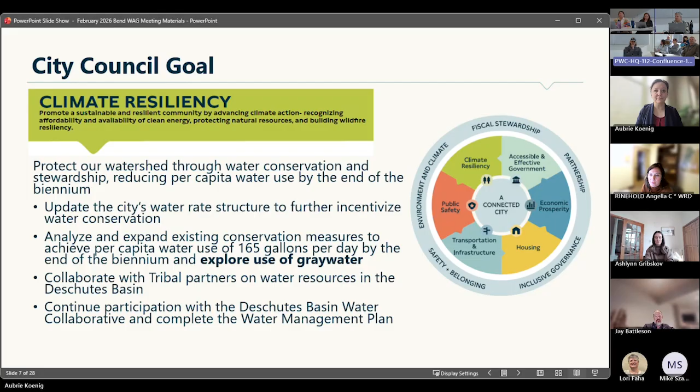So that's kind of just a little bit of background, and then I'll hand it over to our friends in buildings to talk about this with everybody.

I'll just do a quick intro and then hand it over to Jerry. Again, my name's Joe, Building Safety Division Manager. We've got about 41 employees. If you haven't noticed, Bend is growing fast. We've got a lot of challenges. Our division looks at energy, accessibility, anything on private property, big or little, doesn't matter, we look at it. We have plumbing, electrical, solar, gray water, stormwater - we have a lot of stuff across our desk.

I'm saying all this because some of the conflicting issues we're trying to solve are council goals of affordable housing, densify, compactable - we get too spread out. We've got to keep that in mind when we go through all this stuff, that we're trying to densify, trying to lower the cost of housing, trying to fight wildfires with non-combustible sidings and things like that. We have a lot going on. We're thrilled to be here.

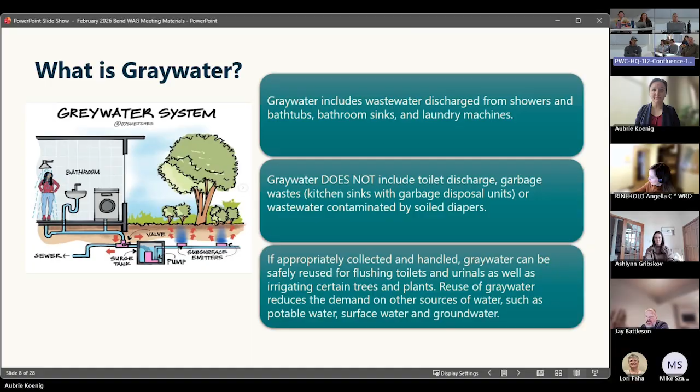The use of gray water reduces our demand on the sources of our waters, such as our potable water, surface water, and groundwater. We'll get a little deeper on some of these things and maybe some examples of what we've used these for later, and we'll discuss that picture there in a minute. So we can move to the next slide.

So Oregon recognizes there's 3 types of gray water: type 1, type 2, and type 3. Type 1 is maybe one of the most common, least inexpensive, and we've had a few people trying this one. It's basically your untreated gray water, or gray water that has passed through a physical process to remove solids, fats, oils, and grease. Type 1 is the lowest quality, and once again probably the least expensive. It's only used for subsurface irrigation.

So that's going to be like DEQ requirements - if my memory serves me correctly, it's about 12 inches outside the building, which is pretty much the target where it comes out. Then it distributes later, and surfaces up to irrigate your plants from below grade. So it's for subsurface - that's type 1. That helps with the contamination and stuff.

Type 2 gray water is treated by a chemical or biological process to reduce the total suspended solids and organic matter concentrations. Because this type of gray water is stabilized through treatment, it can be used for drip irrigation and in your landscape ponds. So instead of just coming from below surface, this one can be used above grade because of this process done to it.

Type 3 is basically like type 2 gray water standards, and it's disinfected to reduce bacteria and other potential pathogens. Because this is a higher level of treatment, type 3 is suitable for additional uses, such as sprinkler irrigation or dust control. So it's a safety measure, basically what that is.

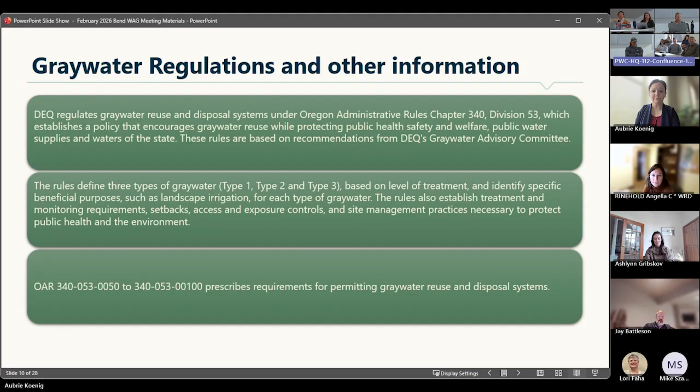And then we'll give you these at the end - I think it comes out in this slideshow too, if you want to go back and look this up, because it really goes in depth of what the rules are that you've got to plan for before you start designing one of these systems. We'll move on to our next one - this is just kind of an example of a gray water system.

So the gray piping technically is going to be either purple or it's going to have labels on it showing that it stands out. Because if you ever did a remodel or something, we look in our Oregon plumbing, on our SAM, basically of alternate methods, you don't want to have a remodel and somebody tie into it and tie into the wrong thing.

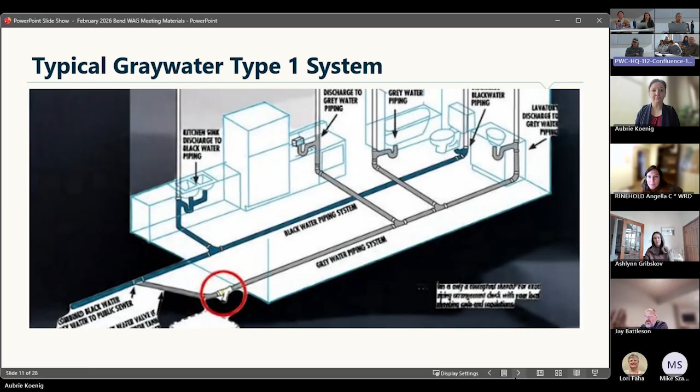So this is our first picture, same thing. You can see the valve that's showing. So our gray water here, it's your shower, your bathroom sink, your washing machine, shows the same thing. It's just that valve that will be turned certain parts of the year. It will go down the sanitary sewer, then when you're able to use it in the summer months, you can turn that, then it goes outside.

And this is the key factor here. So like our landscapers and designers, when they design this stuff for you too, once it leaves that 3-way valve outside that building, that's where our plumbing code stops, and DEQ regulates all of that. So we're looking at everything to make sure we've got the right fixtures in there. It does require a plan review for us to make sure it's done correctly inside the building, so we don't cause further contamination outside the building.

And that's why even our labeling our pipe is very important, to protect everyone's health later.

But like that box with the pump and the surge tank, that's something you don't look at. No, and this would be type 1, just the subsurface irrigation. Exactly, so this is the simplest one.

This is where we brought this up later. I think somebody mentioned a certain site that has this. And right there, that's the subsurface, so that's then going back up. Like I say, going off memory, it's talking to DEQ, I think it's like 12 inches, there's a certain depth in there.

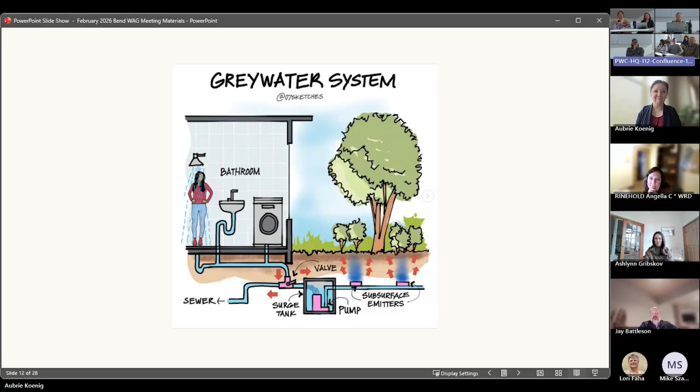Okay, if we can get our next slide. So this is just really similar. We just picked a few examples that we could find, and these are off the internet, so none of them are always accurate, could be a little bit different. But we've seen this before where maybe somebody wants to just have one particular bathroom, or maybe you're doing a remodel and you don't want to tear your whole house apart. You could pick and choose things, or you could do it all together if you wanted.

So these are just some examples. So you can, to me, I'm a picture person, so. Okay.

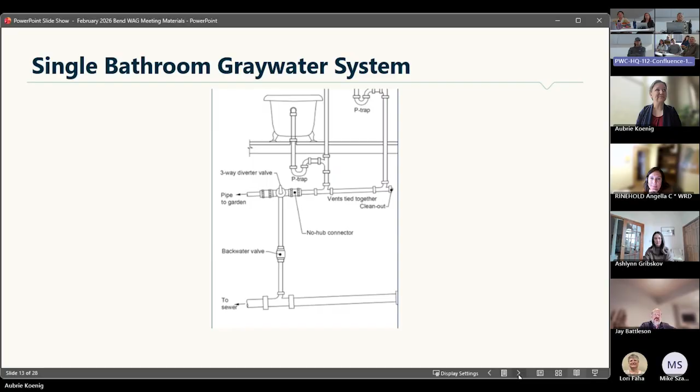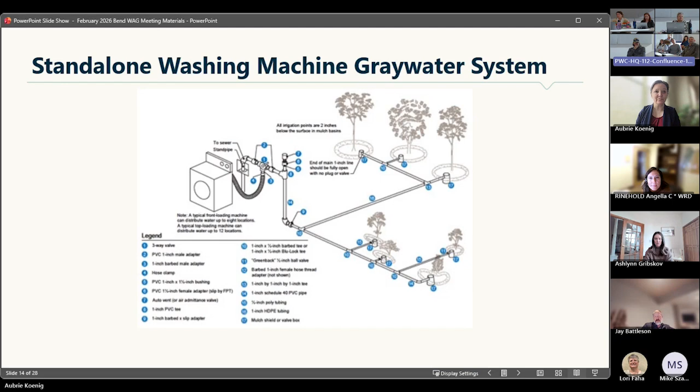So that's basically the kind of thing we'd be doing for distribution outside for the irrigation, that type 1, 2, and 3. Our next slide involves a little bit more of the plumbing code.

Gray water really isn't in our plumbing code, so what the state did is create what's called the SAM—a statewide alternate method. The state of Oregon Building Codes Division has a SAM, a statewide alternate method, as they did it back in 2017. It covers gray water reuse systems for commercial and residential installations.

So in Oregon, we're able to do this and bring it back into the building. This particular system could be all indoors. We did one where it was in a garage, going to this tank. If you see there, we have our shower and our bathtub—it goes to this tank and is being treated. This isn't like a type 1, this is like type 3, where you have to treat it because you're bringing it back into your system. Then your system's isolated, so you can only flush your toilets with it.

In other states, I think you are allowed to use it for the wash machine, because somebody did plumb it that way here, and I happened to show up and they had to replumb it—they had to take that out. You can't use it for your wash machine. I'm all for that, because if your system isn't working well, you'd be wearing those clothes. But I guess it's like your hot tub—depends, some of them are clean and some probably aren't. So anyway, this is just an example of what you can do indoors.

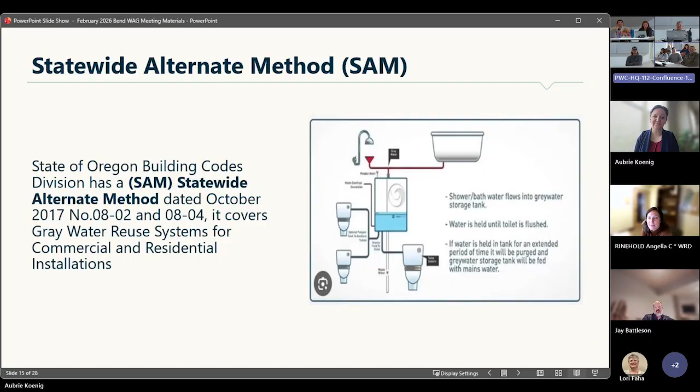What does treatment mean, like what sort of treatment is that? We'll get to that a little bit later. So yeah, it's more like bacteria and different things that get treated for.

Next slide please—thanks to Dina, we found this one online. It says, things to consider. This is just a typical example of our water usage. The average person in the United States uses approximately 50 gallons of potable water a day for indoor use. Installing low-volume plumbing fixtures and water conservation systems can reduce potable water consumption by almost a third.

That's one thing the Building Code Division has done over the years. When I started plumbing—dating myself here—right out of high school, they were 5-gallon flush toilets, that was typical. Then we went to 3.5, then down to 1.28. Now we have stuff even lower than that. So they've been changing and evolving, trying to make things work.

That's been working. Here's an example of our average domestic water use. Sometimes we might not think of this, but our shower and baths are like 35% of the consumption. Toilet flushing is 30%, laundry's 20%, kitchen and drinking is 10%, and general cleaning is 5%. I'm not sure, that can vary, but that's kind of an average.

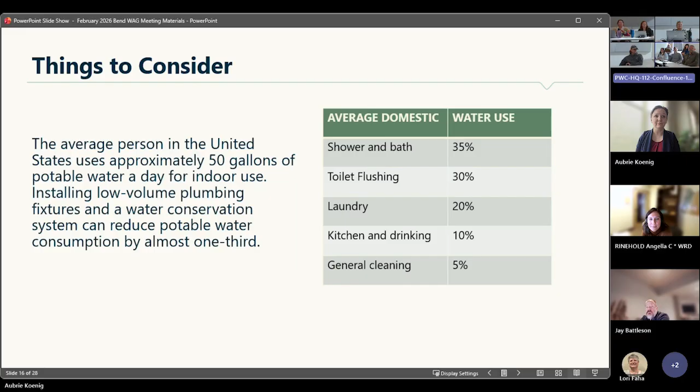This next slide is another example of a gray water recycling system for indoor use. This figure shows a basic gray water system—wastewater from a shower, bathtub, washing machine, and bathroom sink is collected and drained into a holding tank, where it's filtered and disinfected because we're going to use it back into the building. The treated water is then pumped to supply the toilets for flushing. You might think we really can't use it for that much, but if you go back to that chart, you can see a toilet uses quite a bit. I'm sure they probably took this off of our newer flush toilets too, possibly.

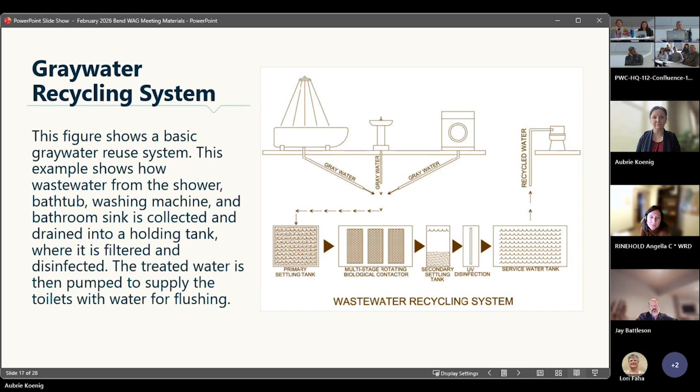And then we have a simple system on the next slide. This talks about how it has a range in sizing, could be from the small ones that supply only a single toilet, which this picture shows in a home, to large ones supplying all the toilets, maybe like in a commercial building.

We have examples of OSU doing that right now. In this particular picture here, it's just one sink that goes down to this tank, and then they're flushing the toilet with that. Most of these units you can get, as it shows here, are like pre-designed units.

When we dig deeper into the weeds with this, you'll see that all these systems, especially for the reuse stuff, have to carry certain listings. You just can't make up your own stuff. That's to protect human life and everything we have going on.

We have examples like OSU, where you guys all go. That's been pretty amazing out there. We've got, I think, 3 buildings where everything's pre-plumbed, so that all our newer buildings can do this system. They have bigger goals they're going to do in the next 5 years. All the toilets, urinals, and floor drains have a separate piping system going to them that they can use for that.

So they don't have that basically in use at the moment. They're just taking potable water temporarily and plumbing through there. But when they get their system finished, they're going to do a complete treatment plant out there and pump that right back into the building. We have it all designed and ready to go for when they do it.

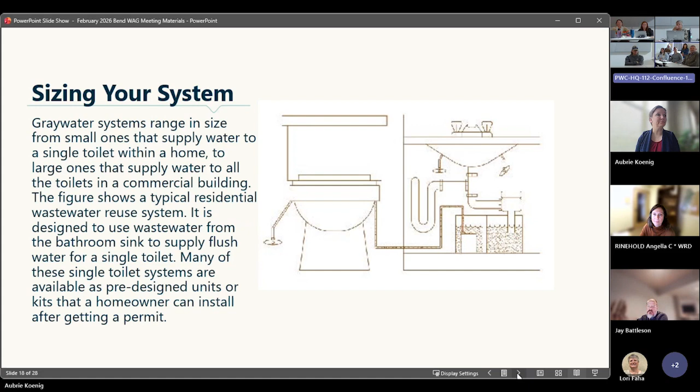Our next slide just shows some of the resources you can go to get a lot of this information from. So if you guys keep that in your pocket and you're bored one night, there's a lot to it.

The water conservation staff should have this book, if folks are interested, they can take a look at it after the meeting. It's called Water Wise Home, by Laura Allen. It's actually really cool - it's like a really step-by-step guide with all kinds of examples in it.

One thing I'd say - I've been a plumber my whole life, and I think it's a really neat concept. But personally, I'd say it's kind of designed for maybe when I first moved to Bend, when everything was like half acre or 12,000 square foot lots. I think you could really make this work to your benefit. But what's hard now is because we have so many people moving here, our lots are densifying and we're trying to get houses on the ground.

Our lots are so small we don't even have anywhere to put stormwater, to be honest with you, on our lots. So now you want to introduce gray water, and we've had some people trying this - we're not trying to be ogres on it, but we also have to protect our community too. DEQ has requirements that it's got to be certain distances away from things. One thing they don't have, because they don't regulate building code, is any distance requirement for right up against the building, but on the building side, we can't introduce water to our footings either. We've had different people try different things, and I give them kudos for trying, but it's just not always designed for every lot - not always the best scenario.

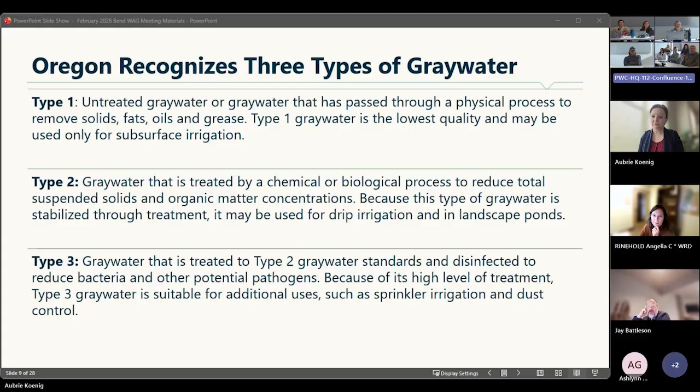And then we're just going to look, once again, make sure your system is properly listed and labeled, using a sanitized system that's approved by the state. Your piping's going to be either purple or labeled correctly, so it would be fairly simple for the reuse inside.

Gotcha. I stumbled on one, it was the washing machine. I'm like, we can't do that, but I found out I think in California, Arizona, you can, one of the states you can, but not others.

The other question I had, maybe Dan, you can help with this. You guys had the 50 gallons per day on average per person consumptive use, but that didn't seem to incorporate irrigation. I'm just wondering what percentage of consumptive use of potable water is common irrigation.

We've got some slides on that. No, in the summer it's got to be, because my bill goes way up. Yes, maybe let's go back to the slideshow because Dan was going to jump in a couple slides here, just a couple more.

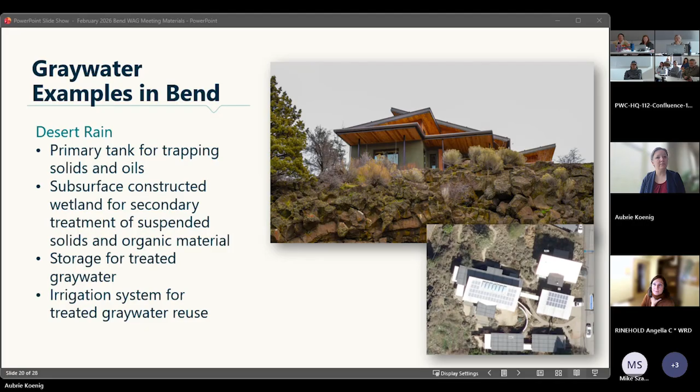So this is just when we're looking at it strictly through a conservation potential lens, like any measure, what's the cost, what's the benefit, what's the feasibility. This is information from our customers, based off information we collect out of the field, doing irrigation audits, things like that. So when we're looking at this, it's how much effort and money are we going to spend as a city to implement this versus the water saved and the benefit to the customer and to our water system.

And then, but you had the information from somewhere else that said 50. That's a national number, 50% is the national, 50 gallons, yes, per day per person. We like our showers long.

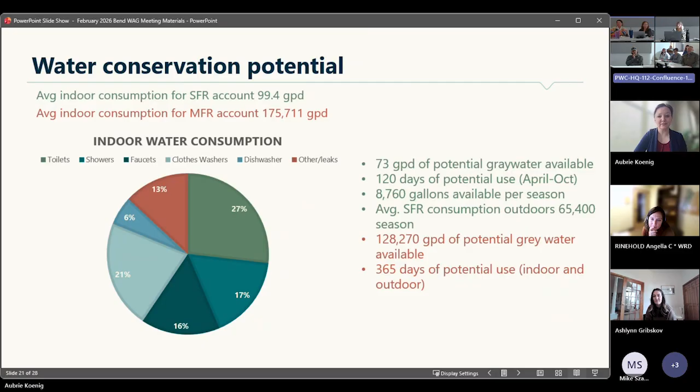I'd say just to go along with her comment on densifying stuff, reuse inside the building, you're talking about the costs. The one I was involved with - he builds a lot in town - he said after he did that, he would not do another one because of what it cost him, with the treatment fund. And it's hard to pass that back on, with everything else that's going on.

But I mean, I'm with everybody else. I think it's a great system for the right lot.

When we first started our rebate program, we had developers reaching out to us from Portland who were designing - I think it's that big multifamily lot off of 8th Street, still just graded out right now, started in April. They wanted to do that, and he was putting the design in - I think underneath the parking lot area, big capture tanks. He asked what kind of incentive is on it. I said, I've got like a $4,000 incentive. That's not gonna help you - what you're talking about is higher level, like development fees.

For the right project, there's probably people willing to do it who are looking at the long-term costs and savings. We should maybe talk through that process. I'm not sure what the issue was - they probably got grants of some sort, that's maybe how they were able to finance their stuff, or maybe some incentive for them.

Okay, it's been a great discussion. I think this is really helpful to both us, talking to council about how we're discussing this for the council goal, and then how to help Dan with some input to figure out how to analyze it for benefits to water conservation.